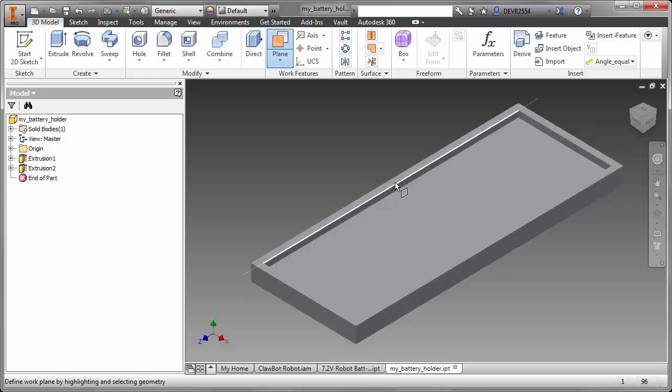In the next phase of the design, I'm going to add a battery clip to the far side of the base. Start by creating a work plane on the center. Just find that midpoint and click. Then using the work plane to create a 2D sketch.

With the sketch created, I can now turn off the visibility of the work plane. Just right click on it and take away that check mark from visibility. It's nice to be able to cut through the part and see what's going on, so I'm going to use Slice Graphics, either from the context menu, the F7 key, or way down at the bottom of the screen you should be able to see that as well.

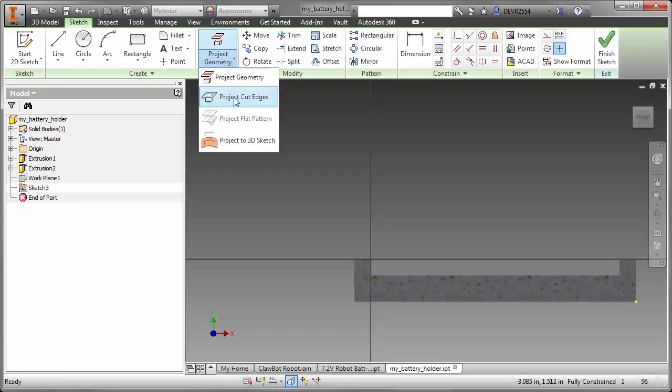I'm going to project the cut edges, and then start drawing some lines. Keep the shape approximately the right size, much easier when you start applying geometric constraints and dimensions. I know the approximate shape that I want from the sketch that I've created. Now there is an arc in there, but I'm going to just draw a line from the bottom.

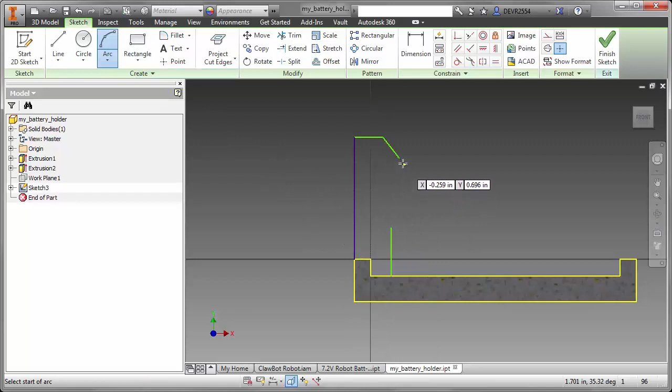Then with the lines drawn, I can get my arc just a little bit more accurately. So go to arc, one end of the arc, then the other, and that's approximately the right size. Let's start adding some dimensions. The overall height is going to be 1.06.

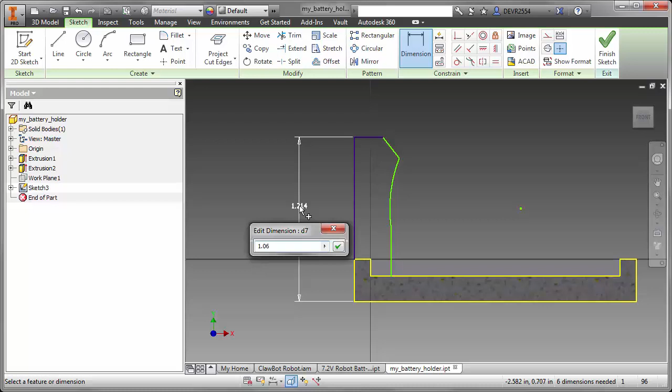Next dimension is that little short line at the top. That's going to be 0.18. Next one's actually an angle, and that's 113 degrees.

Now you'll notice that the curve has kind of moved out, that arc has shifted over to the left, so I'm going to get out of the dimension tool and just drag that back into place. Makes it easier when I add all these dimensions. So, back to dimensioning. I'm going to place that dimension to hold that line in the correct location, and that's going to be 0.15. Radius of the arc, that's going to be 0.534.

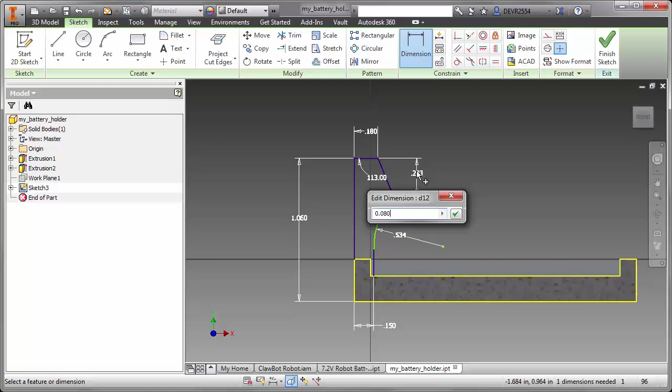You'll notice that by the color of the lines and by the information at the bottom of the screen, we still need 2 dimensions to fully constrain. So let's add those in. So this little short dimension is 0.08. And then to fully constrain the sketch, from the top surface to the center point of the arc, and that dimension is 0.4. So you can see how the color of the sketch has changed, and the information at the bottom of the screen says fully constrained.

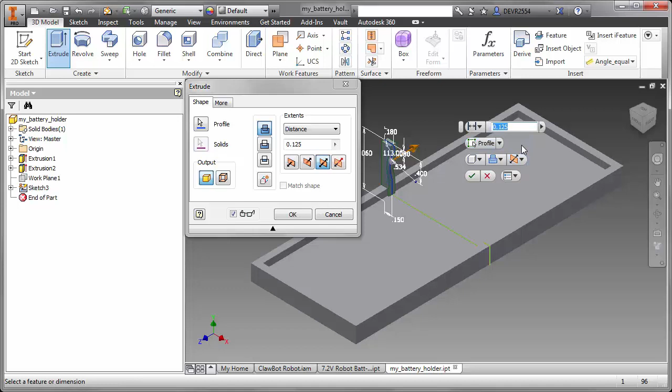So, finish the sketch, and now I can go ahead and extrude that. It's going to be centered, so I want to use the symmetric option and put in a distance of 1 inch. And then we have the first of the battery clips created. In the next phase of the design, I will mirror that battery clip and add some more features.